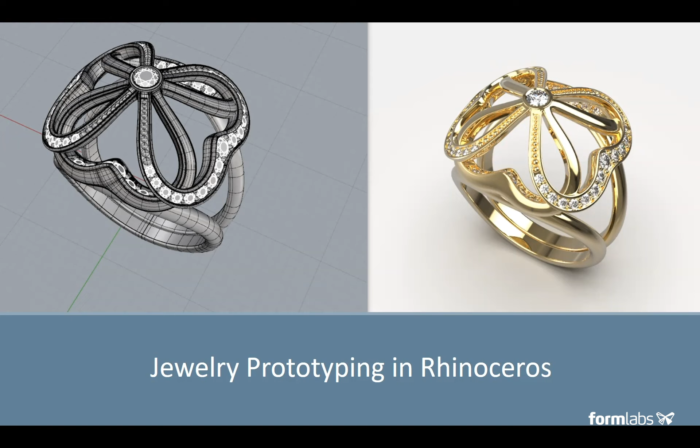As Lizz mentioned, I've been working in various capacities within the jewelry and fashion industries for over 10 years, and a lot of that time has been spent prototyping in Rhino. So I'm excited to share with you some of the knowledge that I've gained along the way in 3D so that you could possibly integrate it into your own workflow.

So let's talk about where 3D can fit into your design workflow. In my workflow, I have 4 general steps to creating a finished piece of jewelry: concept design, 3D development, prototyping, and manufacturing. Every designer's process may be a little different, but generally when I'm developing a new piece, I begin with concept design. Concept design for me means sketching and gathering references, but for some other people, concept design could be straight in 3D. If you do start with a sketch, in 3D you can bring in your reference image and begin building off of that.

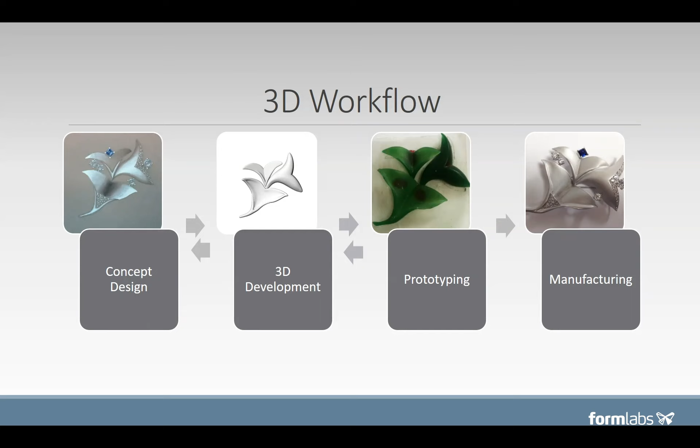I've marked the arrows going both ways for the first three phases because oftentimes this workflow isn't completely linear. You may get callouts and you need to go back to the concept design or back into your 3D model and make modifications. This is very common, but of course the goal is to have as few back and forths as possible. Adding 3D into the mix really enhances the visuals and information provided to both the client and the manufacturer and helps you get to that last phase, a manufactured piece that can be sold or worn, whatever your end goal is.

Benefits. Just want to highlight a few benefits that I think are really important for Rhino with jewelry. First, we have quicker decision making. As many of you know, there are a lot of small details that need to be worked out when creating a piece of jewelry. Details like junctions or transitions or stone sizes, those are all elements of designs that may not be fleshed out during your concept phase and may affect the end look of your piece. When you're creating in 3D, all of those details are worked out. You're looking at a fully visualized representation of your design and can make almost instant design calls and modifications as you build your 3D model.

Next, we have clear design intent. When you send a 2D design to a factory, inevitably there will be some interpretation involved. You don't need to rely on anyone interpreting correctly if you have a 3D file. What you want your piece to look like from every angle has already been thought through.

Quicker development time. When there are fewer details or detailed questions to be worked out at the manufacturer level, it will mean you've cut down the time needed for development with that jeweler or that factory. Providing the clear design intent means less iterations and you can get to an approved final version of your piece in less time. Another great benefit is that 3D is very cost effective. As they say, time is money. Less iterations mean less cost of materials and less labor.

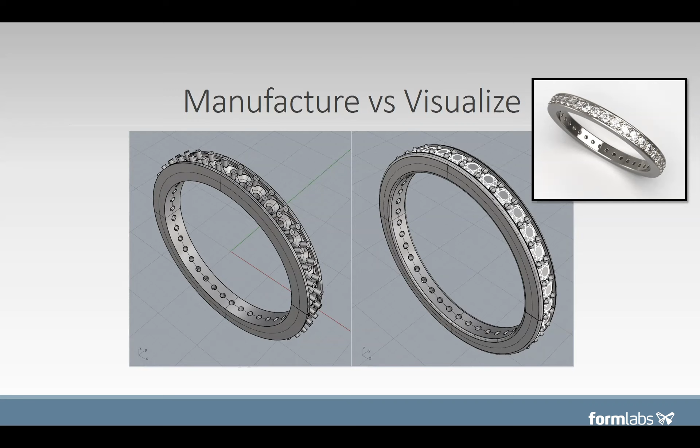The file that you create for rendering, on the other hand, is to visualize your end result. When you show a final design to a customer, you want to present a finished looking piece. And in that respect, the prongs and the edges, they'll be polished down and the stones will look like they're set. So just keep that in mind when you're beginning a new project. Ask yourself, what is your objective? So let's get into Rhino a little bit.

There's a lot of 3D software out there, and you'll find that a lot of them work very similarly. I primarily use two programs. I use Rhinoceros or Rhino, and I use T-Splines. Rhino models NURBS surfaces. NURBS modeling is often found in industries where form and function are important. So think aerospace and architecture, and of course, jewelry.

I find working in Rhino allows you to have a great degree of flexibility in your designs while still maintaining the precision modeling needed for prototyping and manufacturing in the jewelry industry. As many of you know, jewelry expression is really limitless, but jewelry is also very small. So when you're working with minimum tolerances for wall thickness in metal or when you're setting stones, it's really important to have precision. There are other NURBS software out there that offer you that level of precision.

SolidWorks is one of them, but what sets Rhino apart is its flexibility. Other programs are usually very structured. You start with a solid object and then you sort of cut away at it to get your desired shape. With Rhino, you can really start anywhere. How you want to build your design is completely up to you.

And then lastly, Rhino allows you to tailor how you work in the program by adding features called plugins. There are hundreds of different plugins for Rhino that you can download to enhance your modeling experience. These can be industry specific, like Matrix, which I spoke about earlier, or it just can be a general modeling tool, which is what T-Splines is, and I'm going to talk about that in a little bit.

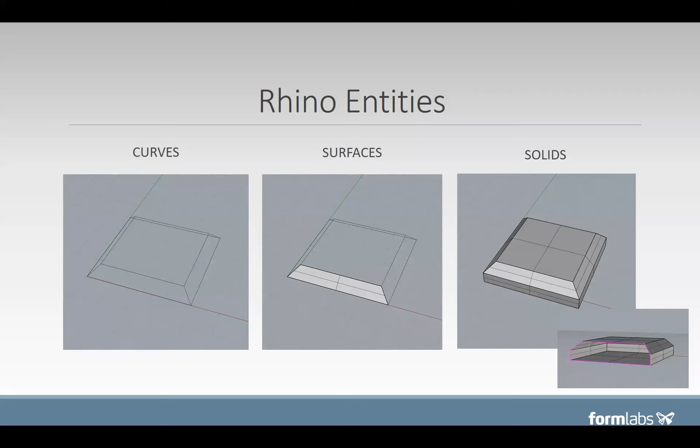T-Splines. As I said earlier, T-Splines is a plugin for Rhino. T-Splines allows you to perform a different type of modeling within Rhino. It's called subdivision or polygonal modeling. Whereas Rhino creates NURBS surfaces, these are mesh surfaces. There are some very popular programs out there where sub-D is the primary form of modeling, such as Maya or Modo. And the reason that they're so popular is it's often used in character building for video games or for special effects. And it allows you to build something very organic with a lot of control.

Where Rhino might be used in jewelry for things like ring shanks or stone settings, I use T-Splines to help create my organic, complex shapes, anything that might have a complex connection point that I want to be smooth. Shapes like this are possible in Rhino alone, but you can really achieve them in a fraction of the time with polygonal modeling. And on a personal note, I find it much easier to explore my designs and play with shape variations in T-Splines because modifying it is a lot quicker for me than in Rhino alone.

A quick aside, T-Splines is no longer available for purchase for Rhino. It was integrated into a software called Fusion 360, but there are plenty of other sub-D plugins available, and any of the principles that you see here today about sub-D or polygonal modeling can be applied to any of those software.

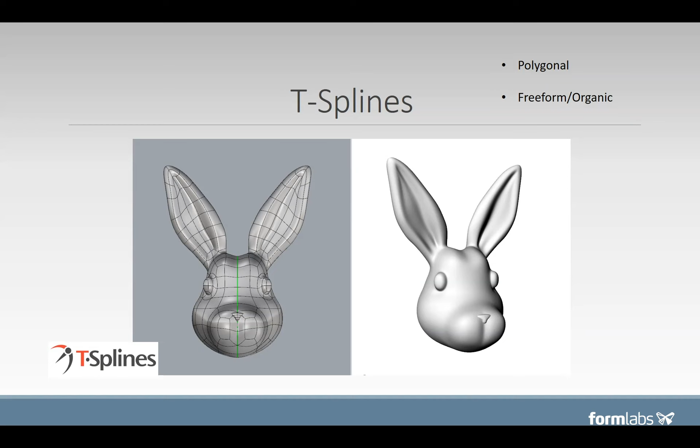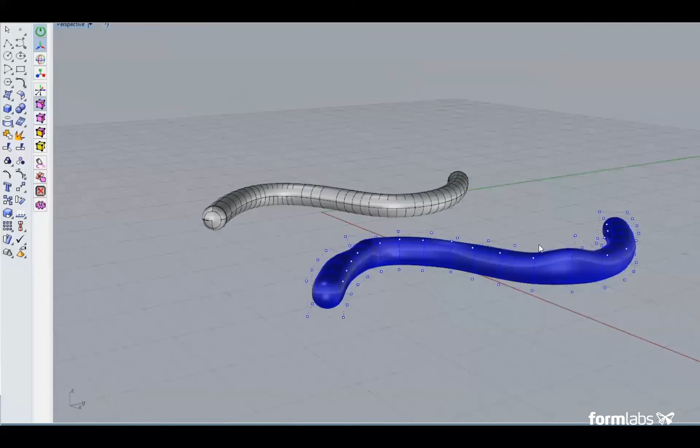With T-splines, I can modify the elements that create it. So I could modify its faces, which you see here are being highlighted. I can modify its edges, or I can modify its vertices, which are the junctions of the edges. And I can do that the same way that I would modify the Rhino pipe, but just with that one element. So I can rotate them, I could scale them, or I could translate or move them. So you see I have a high degree of control when I'm modifying my T-splines. You can be very targeted in your modifications to a sub-D model without a lot of extra steps. And that's why it's very useful for models that are more free-form or organic.

So let's get started modeling. We're going to be modeling this butterfly ring. I'm going to model the shank in Rhino, using curves to show you how that's done. And then I'll model the butterfly in T-splines so that you can see how that's important for an organic shape that you might want to explore your design with. So let's get out of this and into Rhino.

So a few things before we get started, I just want to explain. There are 3 different ways that you can initiate a command in Rhino. You can do it over here with these buttons. If you extend, there are further buttons inside, and if you hover over, right and left click mean different things. The same commands are up at the top, they're just separated by categories, so all the curves are in here, surface, etc.

And then you can initiate a command with the command bar by typing. So if you know what your command is, you can just start typing. There is no right way to initiate a command. Just know that I do all 3. I mainly type, but I do find buttons sometimes or go up to the top. Really, however you want to do it is fine.

And then the other thing that I want to mention is that it's really important to maintain an organized, structured layer tree. So you see over here, I've already created a new layer for each entity that we will be using. And this will be really helpful when we need to go back and reference something from earlier, or if later we need to make modifications to something. It's not all in the same space, it's very organized, and I'm not going to lose any of my information.

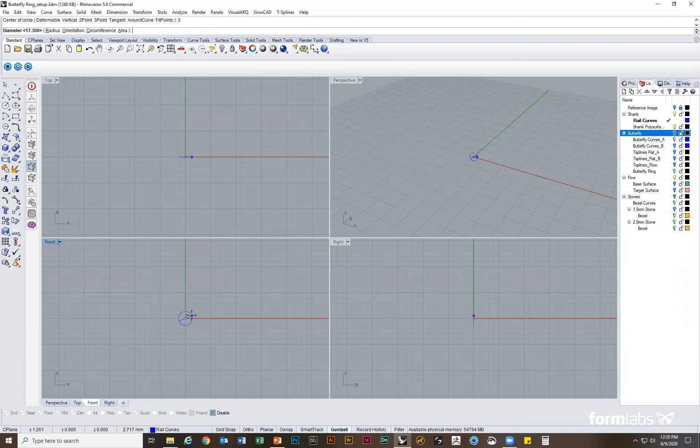I'm gonna come over here to circle, and one thing that Rhino is really helpful with for beginners is that Rhino actually prompts you. It asks you questions in order to complete the command. So if ever you're stuck and you don't know what to do next, all you have to do is come up to the command bar and look and see what it's asking you. So in this instance, it's asking me, where do you want the center of your circle? Well, I want the center of my circle to be at the origin, so I'm just gonna hit 0 and hit enter. And now it's asking me, what do you want your diameter to be?

Well, if I didn't need it to be parametric, I could just pull out to whatever size I thought looked great, but I do know I need it to be 17.3 millimeters, so I'm going to type that and hit enter. Now we only need the bottom portion of this finger hole at the moment, so I'm going to split it with the command split. And I'm going to split it, this is my object I would like to split, and I'm going to split it with a point. So I'm going to come over here, oh, my snaps are off. I'm going to get a mid snap and an end snap and hit enter. And now you see I have 2 separate curves.

So I'm just going to lock this top portion because I don't need it right now.

So now what I need to do is tell Rhino what I want the shape of my ring to look like. Do I want it to be square? Do I want it to be round? I'm basically going to build cross sections of my shank and allow Rhino to flow it along this finger hole.

So I'm going to build my profile. This time around, I think I want the inside of my ring to be flat, and I would like the outside to be a little round. So I'm going to build a profile that looks like that.

I'm going to come over here to my line, and make sure that I'm at the end of my finger hole and click. Now I know that I want a 2 millimeter wide profile at this point, so I'm going to hit 1 because it's 1 in each direction. And I'm going to hit shift to make sure that it's straight and click.

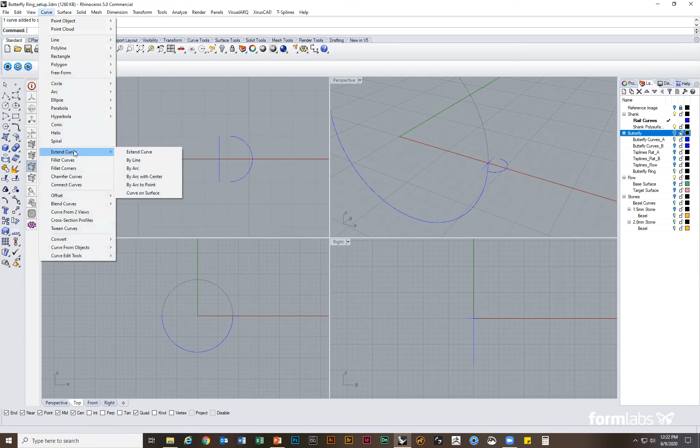So now I need to connect my 2 curves. I'm going to come up here to curve, extend curve by line, and just make sure that my 2 curves meet. You see I still have 2 separate curves, so I'm going to join them together so you can see it says 1 closed curve at the top.

Now the last thing I need to do is a little too sharp here. This model is for visualization, so I want to add all of those fillets in, all that polish, those polished edges. So I'm going to use the command fillet, and I want to change my radius to 0.3 millimeters.

So I'm going to select the two parts of my curve, and you see I've filleted, I've rounded out that corner. Now, another great feature of Rhino is that it allows you to save time by right-clicking, and you can initiate the last command that you just did. So I've just done that, and I'm just going to fillet this other edge.

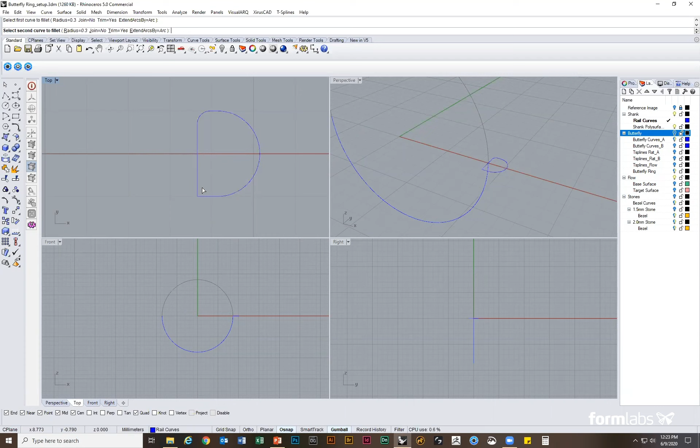Okay, great, so now we have our profile curve. Our shank is actually going to taper, so it's going to be this size at the midpoint, and then it's going to get larger at the bottom and taper to the same size at the other end. So I'm going to take my profile and mirror it or copy it to the other side to make sure that it tapers to that same size.

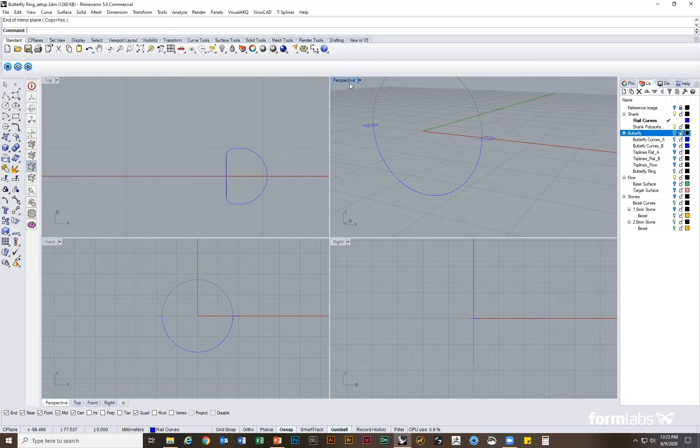So I'm going to hit mirror, and mirror it onto the other side of my finger hole. So I've already created the larger portion. I did it the same way that I've shown you the smaller one, just in the interest of time.

So now let's get going creating our shank. I'm going to get onto the right layer, which is our shank poly surface, and I'm going to use a command called sweep 1.

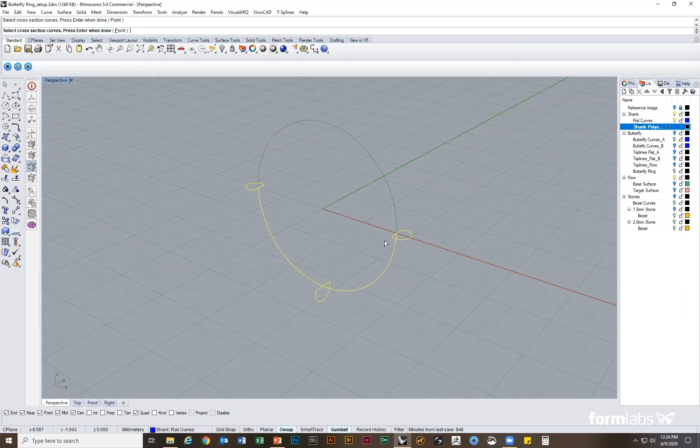So Rhino's asking, what rail do you want? Well, I want the rail to be our finger hole. And then what are your cross sections? Going to select our cross sections. Now I could have gone counterclockwise or clockwise, either way doesn't matter, just as long as you are selecting them one after the other. I'm going to hit enter.

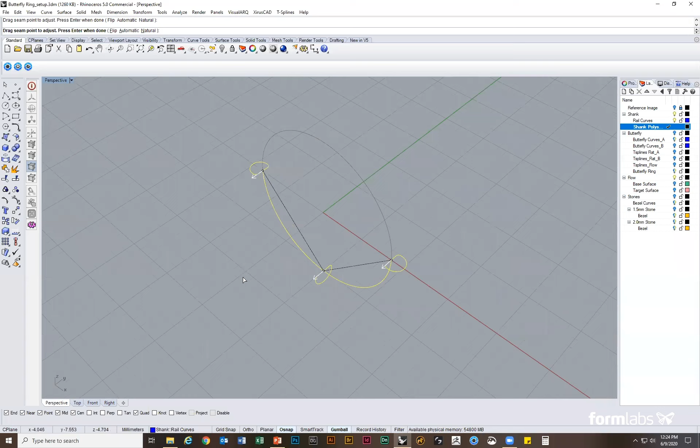And the last thing I need to do is adjust my seams to make sure that they're all hitting my profile in the same spot. I usually just move them over to where they intersect with the rail so I know they're in the right spot. Then you just need to make sure that your arrows are pointing the right way. Now they are. Hit enter.

Here are some other modifications that you could make, but I don't need any of those. I like what my shank looks like. Now you see I have an open poly surface, or open surface, that is my shank.

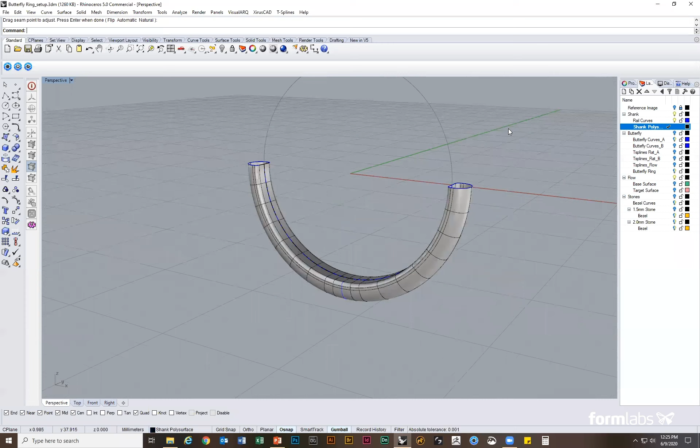So now what I need to do is start building my butterfly. I'm going to turn on this reference image. It's just a rough sketch that I made, and I've already pulled it in, scaled it, and placed it where I want it to go. Those are things you would have had to do if you were starting from scratch.

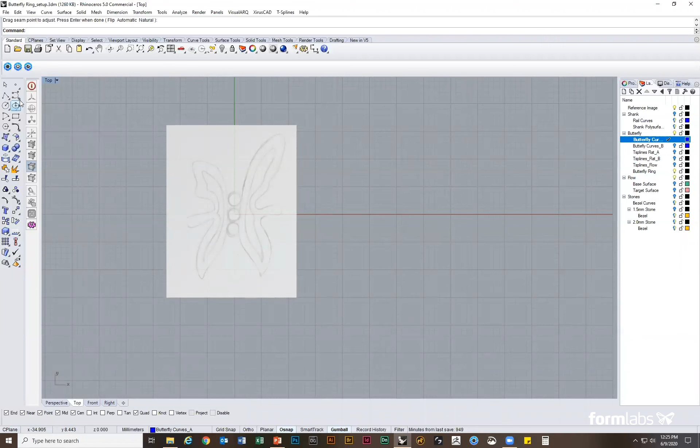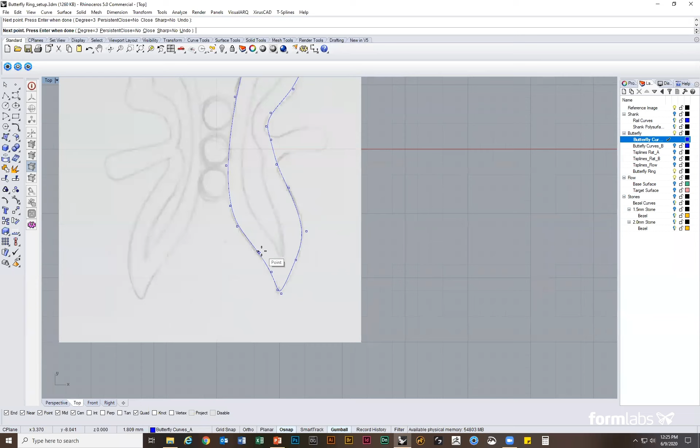But I want to start tracing over my butterfly, so I'm going to use a control point curve and just start tracing. I'll click everywhere the shape sort of changes, just keep clicking, and make sure you're closing it up so you get a point snap and close your curve.

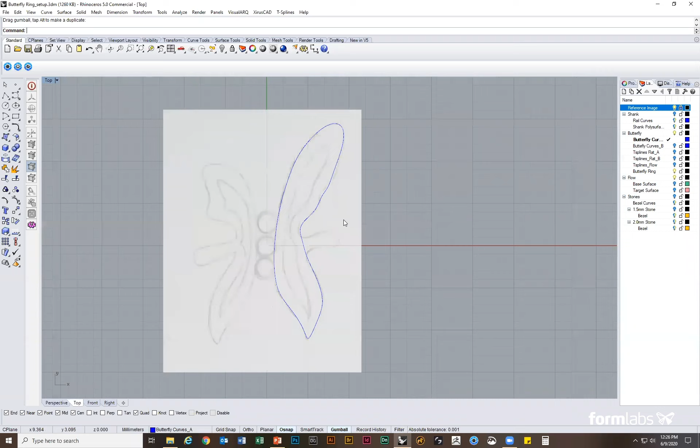Now, if I didn't like this, I could start over, or I could lock that, turn on my control points, and move my points so it fits the shape I want. I need to do this for the outside of my wing and the inside on both sides. I've actually already done that - you see I've created a curve on the outside and inside for this wing, and the same on the other side, with a couple modifications based on my drawing.

Now we need to create a surface from these curves. There are a couple ways to do that, but I'm going to turn this surface into a T-splines, because when I put it on my ring, I want to be able to modify it. I might not like the shape once it's up there, so I want it to be a T-splines. In order for that to happen, I'm going to use a command called sweep 2, which is very similar to how we made our shank, but that way I can turn it into a T-splines.

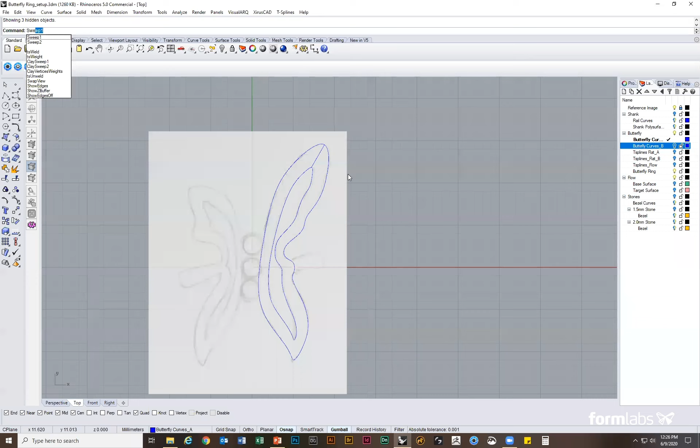So I'm going to use the command sweep 2. Let me just turn off my reference image. What is my first rail? This is my first rail, this is my second rail, and this line here is my cross section. I'm going to hit enter. Now everything that it's created here, all of these lines, they're called isocurves, and it's basically just information telling Rhino how the surface needs to look.

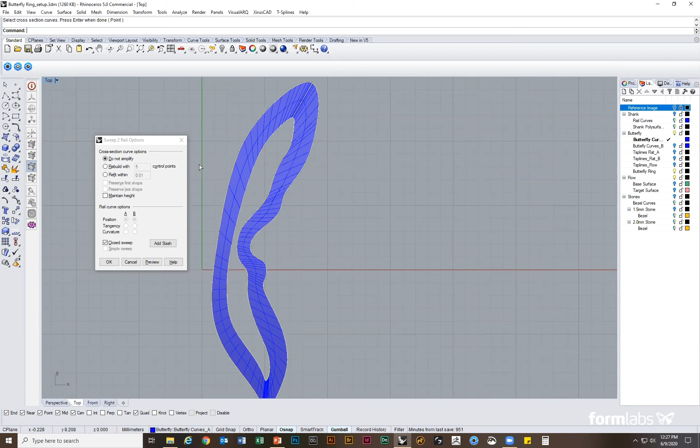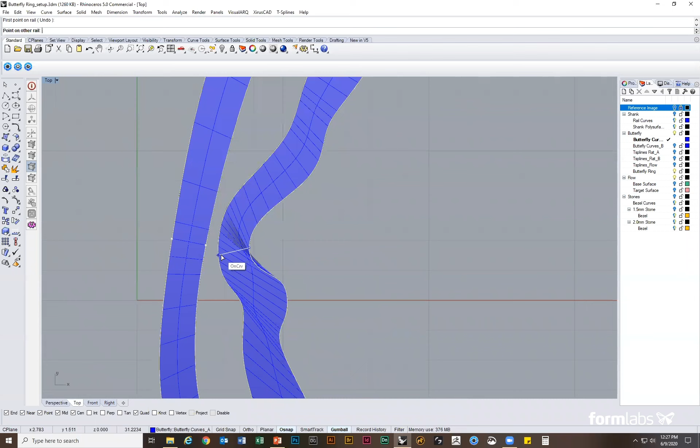Because I'm turning it into a T-splines, I want to make sure I'm very targeted in where my isocurves are and the direction they're going. So I'm going to come over to add slash and start straightening it out a little bit, clicking on one end and the other, making sure that anywhere my isocurves are a little angled, they become straighter. Right here it actually folded over itself, which would not be good, so I'm going to straighten that out, and here and here. Okay, so now it looks okay. Hit enter and hit okay.

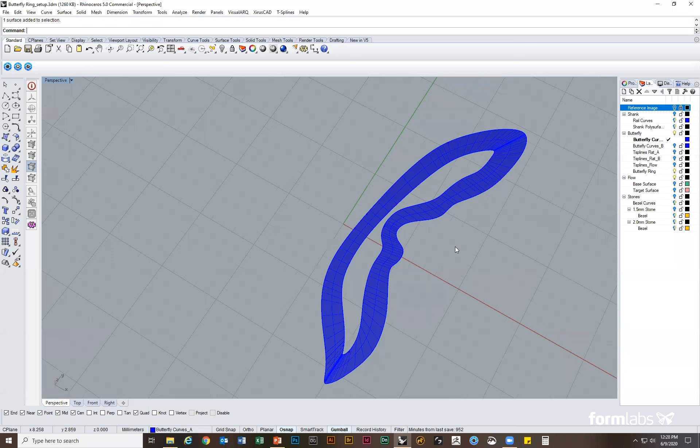So if you see from the perspective view, it's just a surface right now - it really has no dimension, but I'm going to turn it into a T-splines and give it dimension after. The next thing I need to do is rebuild. I rebuild a lot when I'm modeling - I think it's really essential to keeping your curves and surfaces simple and even. This step will really help when you're doing more complex commands like filleting edges, blending surfaces, or booleaning. If you rebuild, you'll have a much easier time doing that.

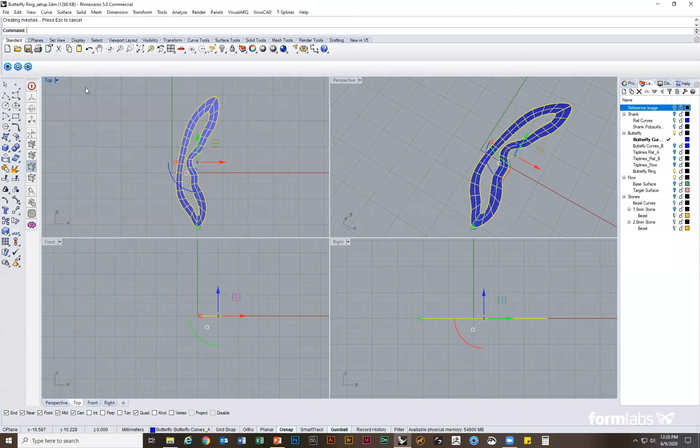So I'm going to select my surface and hit rebuild. Now I can designate how many points I want going each direction. These points are fine - I think 30 will get me to where I want to go, and 4 is fine for the V direction. I'm going to hit enter. Now you can see it actually changed the shape a little bit because Rhino essentially lost information of how that shape is going to go. But because I am turning it into a T-splines, I'm okay with this.

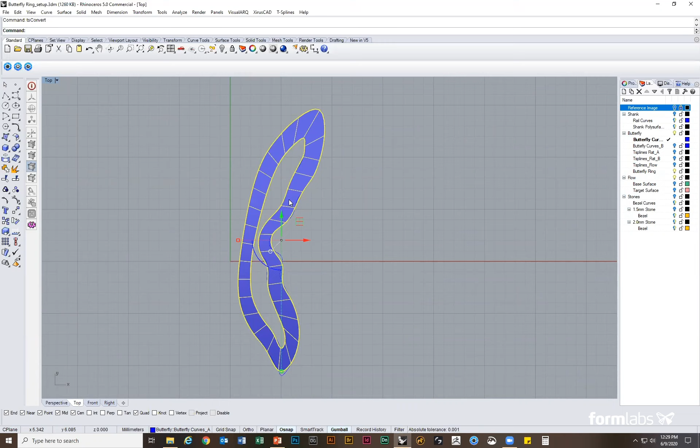So I'm going to hit TS convert, and that's going to turn it into a T-splines. Anytime there's a TS before your command, you'll know it's a T-splines command. Now I know this is a T-splines command because if I come over and enable T-splines, you can see I now have faces, I have edges, and I have vertices.

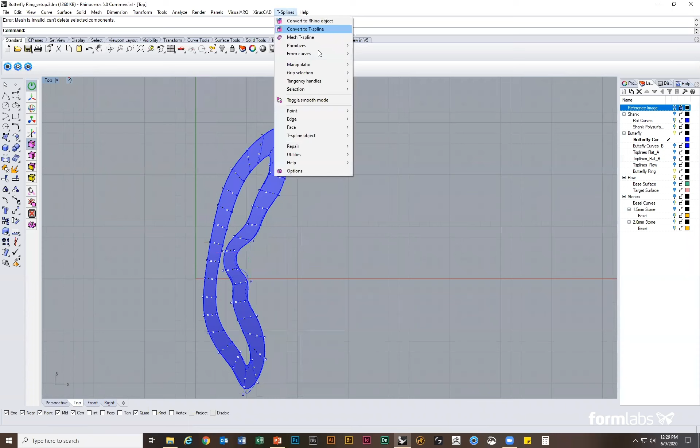Now those inside vertices are not something that I want. They're tangency handles, and I'm just going to delete them. I'm going to come up here to tangency handle and select all tangency handles and delete. That didn't work. Let me try one more time. Select all tangency handles and delete.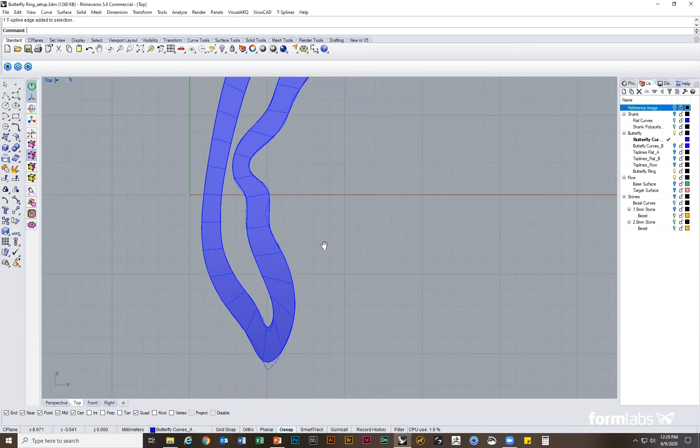So now what I can do is I can just start modifying my T-splines. I can take my Gumball and I can start pulling on my vertices or pulling on my edges to make it look the shape that I want it to look. I can even come over and add an edge if I want. So I'm going to double click on this edge and I'm going to hit TS insert edge and add an edge here.

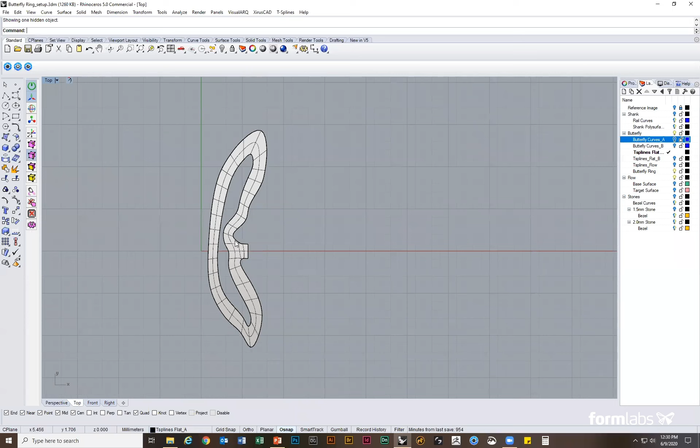So I've actually already done this. I'm going to hit show to show you. This is my T-spline surface. I've made it so all the edges are where I want them to be. I've also added a few faces coming out here, and that's really going to help with connecting my butterfly onto my shank at a later time. So I have it for this side and I have it for this side.

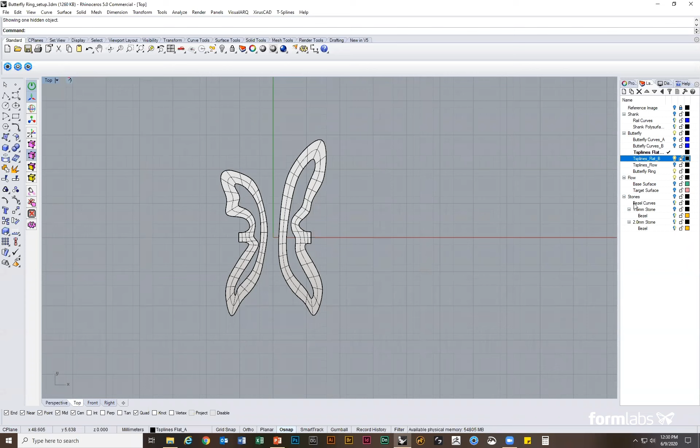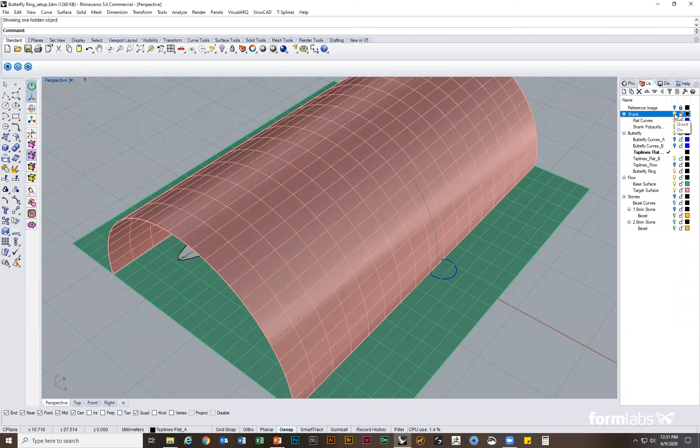So now what I need to do is, it's flat right now. It's planar, and I need to put it on my ring. And I'm going to do that with the command called flow along surface. So what I need is two surfaces. I need a surface that's flat, that is the same plane as my butterfly wings, and I need a surface that is where I want it to go, and that's going to be the top of my ring. So I actually got this surface from this top portion of my finger hole that we lofted earlier. I created a surface out of it already to save time. So the command is flow along surface.

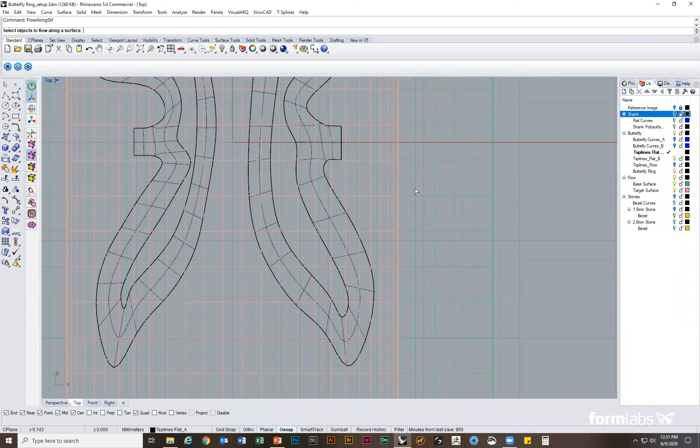It's asking what objects do you want to flow? Well, I want to flow my butterfly. So I'm going to make sure that I grab my butterfly. I don't know why this isn't working. Oh, it's because T-splines is on. Let me try again. Flow along surface. Objects I want to flow.

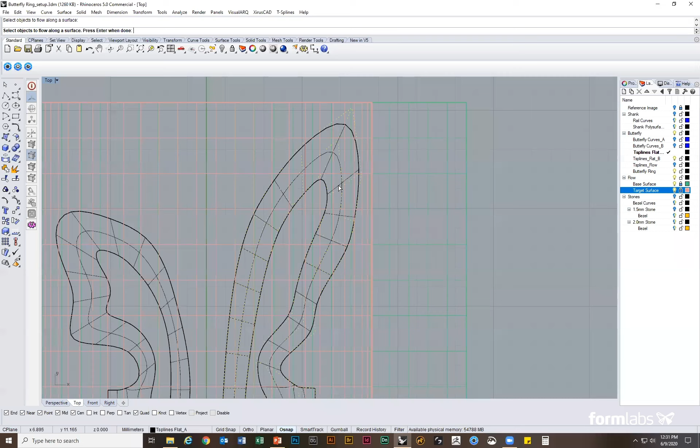It's my T-splines. Now you're going to get this little dotted yellow cage, and that's a good thing. That means that it's keeping it a T-splines. If you didn't get that cage, then it would actually be turning it into a Rhino surface and you wouldn't be able to modify it after. So we're happy with this cage. Now it's asking, what's your base surface? Well, the base surface is my green flat surface.

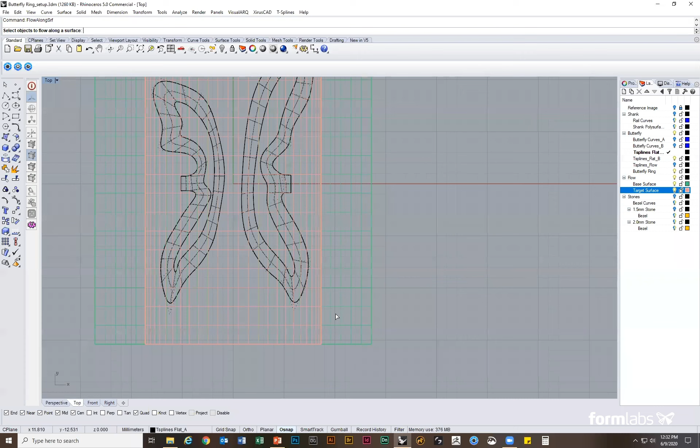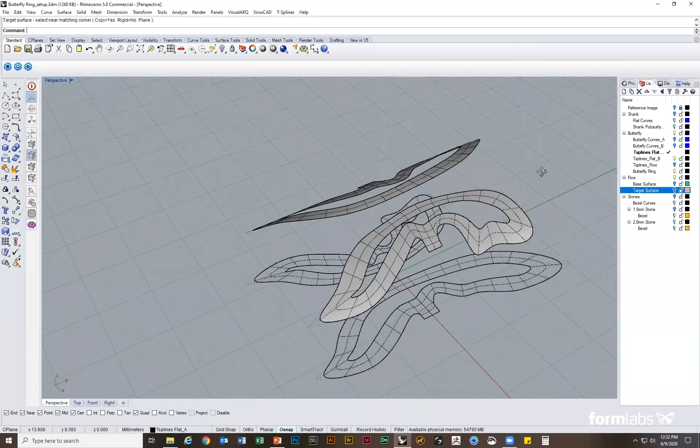Oops, sorry, I need to do this one more time. Object I want to flow is my butterfly. Base surface, and the pink surface is my target surface. So if we come over here, you can see I've essentially put my butterfly onto my ring, onto my finger hole. So let's just delete out these meshes. I'm going to hide this.

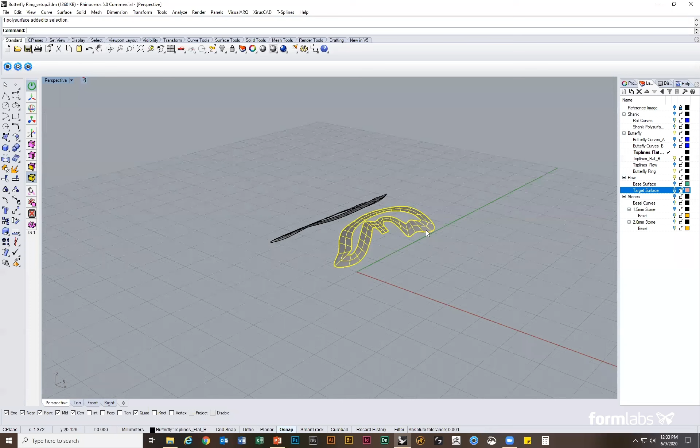And now I can just start playing with my T-splines. I'm going to thicken it. I'm going to give it dimension. I'm going to use the command TS thicken. I'm going to thicken 1 millimeter. So now you can see I've created sort of a squished pipe almost.

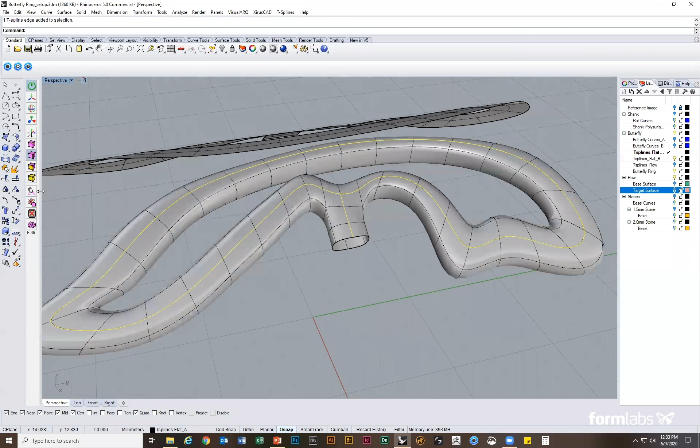And I'm just going to start modifying. I'm going to delete these faces. I'm going to take this edge and this edge, and I'm going to pull it up 0.5 millimeters because it's still a little too flat for me. So now it's a little rounder, it's a little chunkier. And the reason why I want it to be a T-splines is because I can now play.

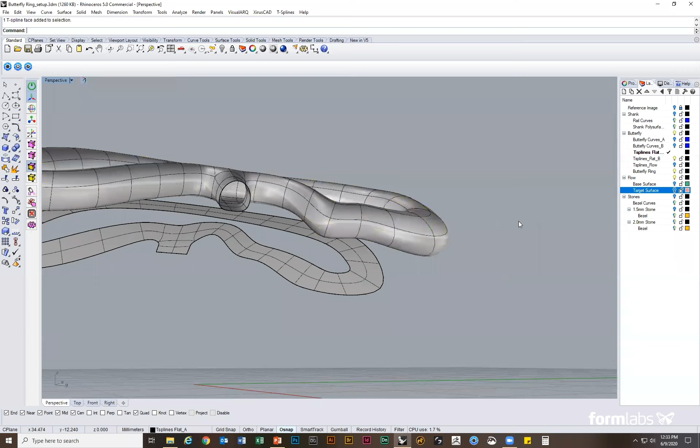So say I wanted the top portion to be a little bit taller than everything else. I can just come up here and I can pull it up. I could do the same for the bottom if I so choose. If I didn't like the shape, now that I'm in here, say I don't really like the shape, I can take some of these edges and pull them out and change the shape.

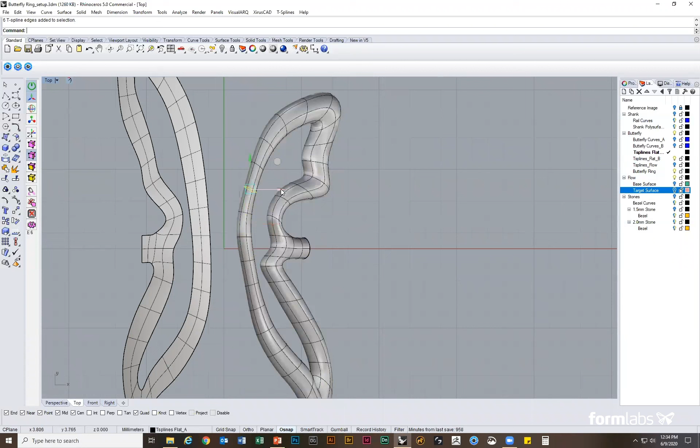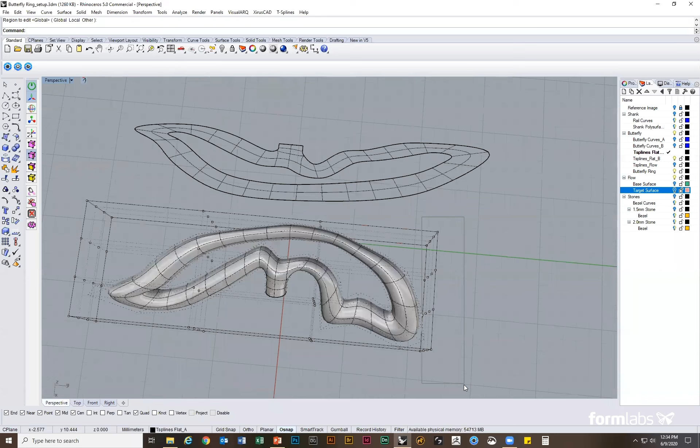I can even do things like broad modifications. I can use a command called cageEdit, which is a Rhino command, and you can get a bounding box, and I can pull these up if I wanted to change the shape. So all of these things are really helpful when you're not quite sure what you want your design to look like, and that's why I want to keep it a T-splines.

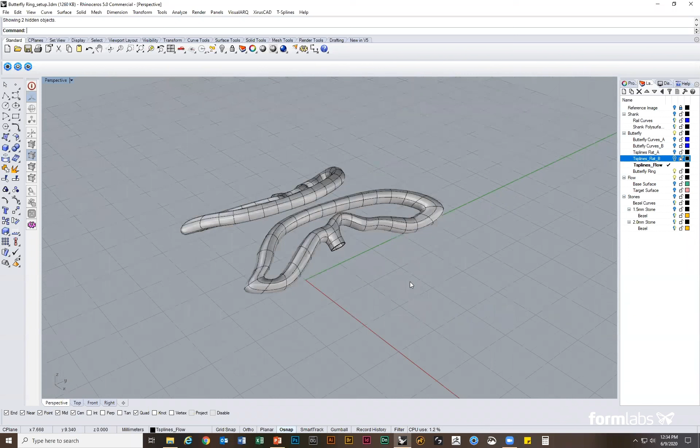So let me just get off this layer. I'm going to hit show, and as you can see, I already have created a butterfly that I like. I've pulled the edges and the faces, and I'm happy with how this looks. So now what I need to do is I need to connect it to my shank. I'm going to copy these and put them on the right layer, and that's going to be my butterfly ring.

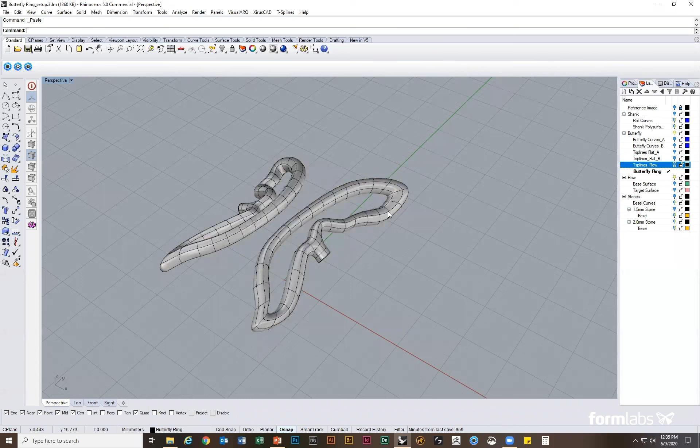And now I'm going to convert these into a Rhino surface. So I'm going to select them, and I'm going to hit TS convert to Rhino surface. So now they're not modifiable anymore. If you see, I turn on T-splines, there's no faces or edges to be able to select.

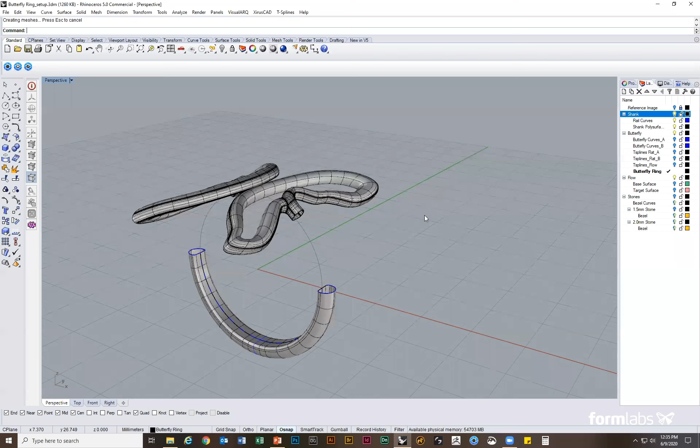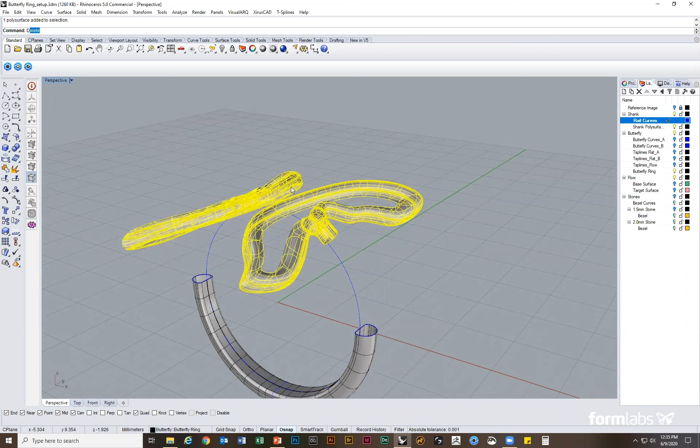Now I'm going to connect my butterfly the same way that I made my original ring shank. I'm going to use the profile of the open part of my butterfly with the bottom or the midsection of my shank. So let me just unlock my curve. And I'm going to create the profile from this open portion of my butterfly with the command duplicate border. So you can see I've created a closed curve from that open space.

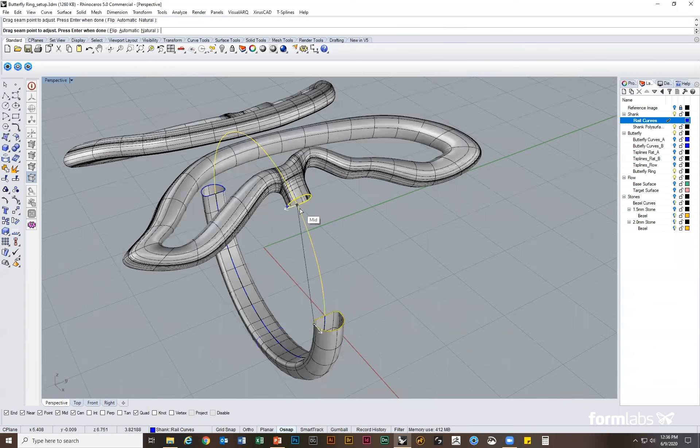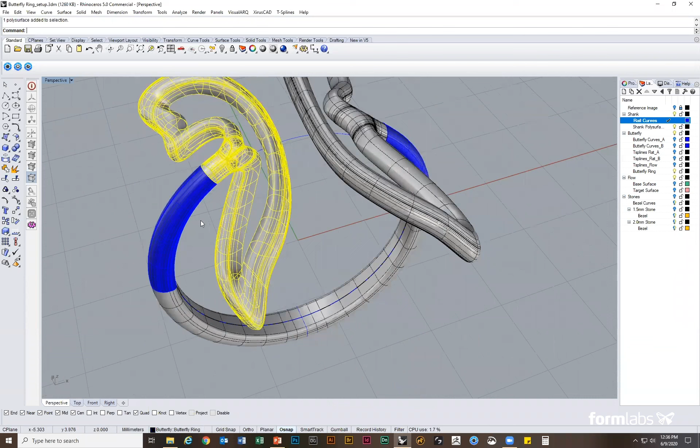Now I'm going to use the same command I used before, sweep 1, and it's asking what's my rail. Here's my cross section, and here's my second cross section. Hit enter. Again, I just need to make sure that my seams match. Hit enter. And OK. Same thing over here. I have a rail, cross section, enter, and OK.

So right now I have 5 separate polysurfaces, and I need to make them one. So I'm going to join them together. I'm going to select everything, and I'm going to hit join. Just want to make sure that it's on the right layer. And I'm going to turn off my curves.

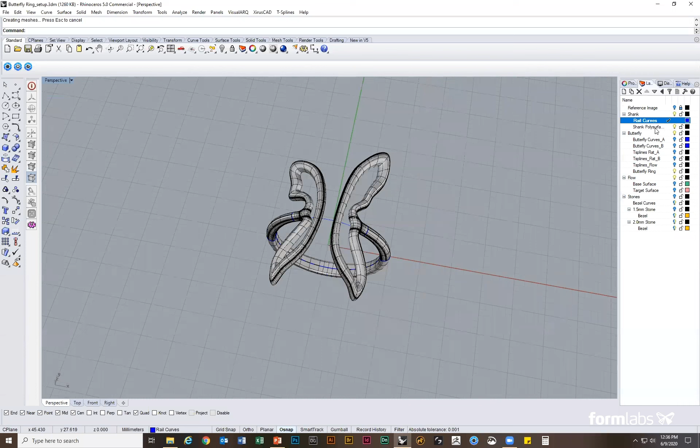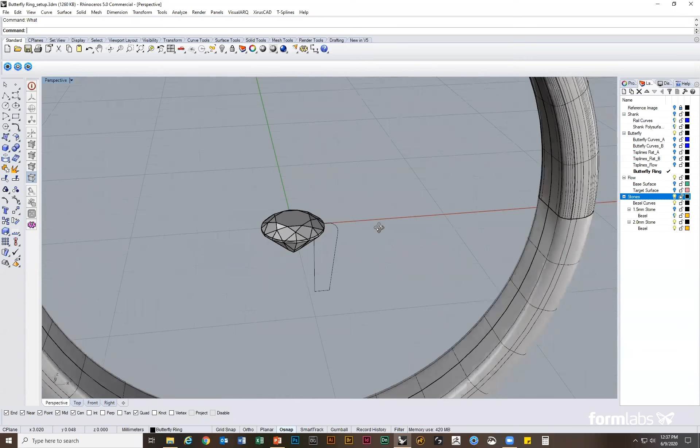So now let's just check that it's closed. I'm going to go over here to What, and you can see it says closed polysurface. So now I know that this surface would be able to be printed if I wanted it to. Now the last thing I need to do is I just need to add my stones. I've already pulled in a stone and sized it to the size I want, which is 2 millimeters, and I've also created a profile curve for what I want my bezel to look like.

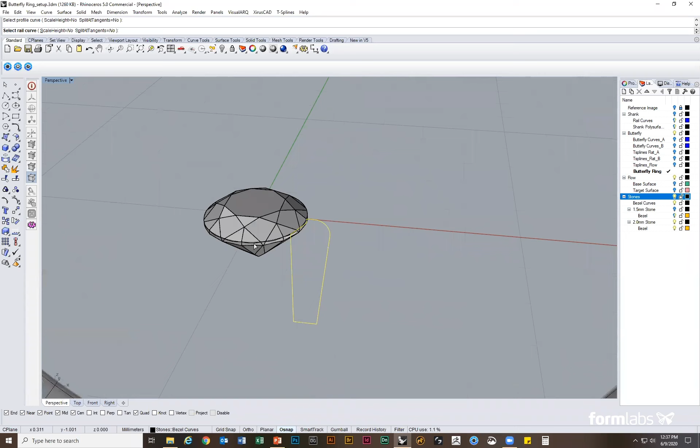So I'm going to make my bezel with a command called rail revolve. I'm going to hit rail revolve. It's asking, what do you want your profile curve to be? That's this. What do you want your rail curve to be? And that's basically the diameter of my diamond. And then what is your revolve axis? And that's just the center of my stone. So I'm going to get a center snap and pull down straight away. And now you can see I have a bezel. Just going to put that bezel on its right layer.

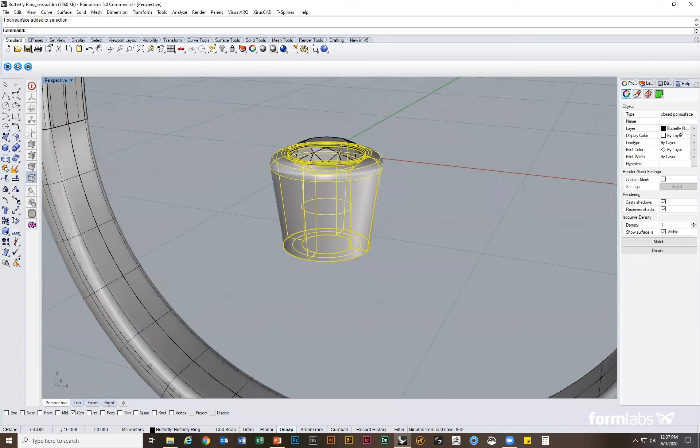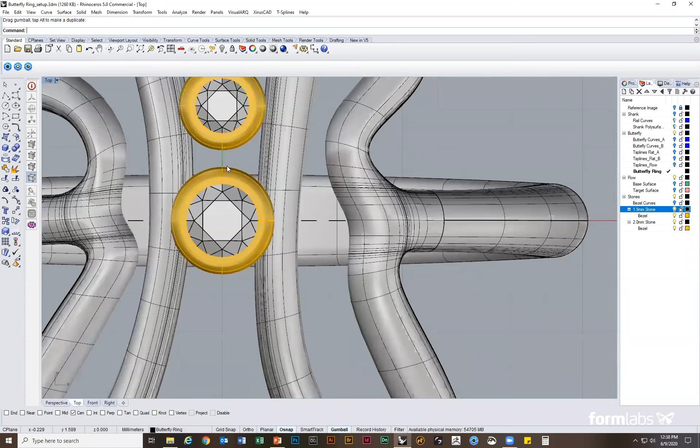And the last thing I need to do is I just need to move these stones and place them where I want them to go. I'm going to turn off my rail curves and turn on, I've already made it for 1.5 millimeters. I'm just going to use my gumball and pull it straight up, pull it to where I want it to be. Then I'm going to come to my top view and pull this over and place it where I want. I'm going to copy it, copy my 2 millimeter to my other side.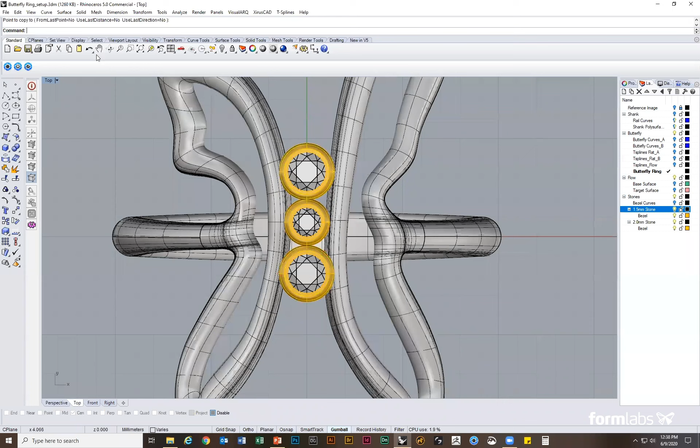And that's really it. I just want to make sure that everything's touching. I'm going to select my bezels and my butterfly and use a command called intersect. And you can see it's created curves everywhere that it's touching, so I know that that's okay. Now the last thing is, these bezels are too tall and I need them to be cut because this ring wouldn't actually fit me right now. The bezels need to follow my finger hole.

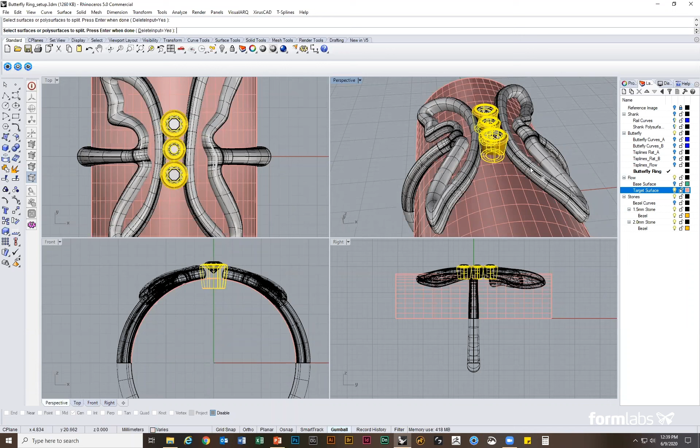So I'm just going to use a command called Boolean split, and I'm going to split it with that target surface that I had created earlier. I'm going to hit Boolean split. I'm going to select all my bezels. Those are my surfaces I want to split. My cutting surface is my target surface, and hit enter. Now you can see I've cut out that portion, so now it follows my finger hole. So that's really it.

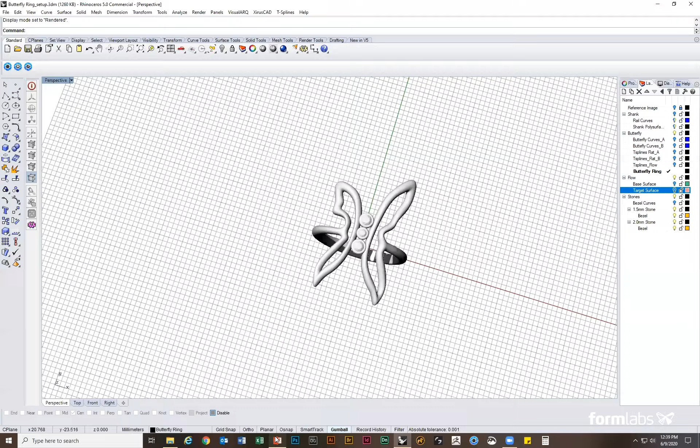Now I have a butterfly ring that I can prototype if necessary. So let's just get back in here. I'm just going to come in.

So if I could leave you with anything, it's just a few tips that I have figured out with working with Rhino. First is work simply. The simpler your curves, the simpler your file, the easier your life will be. To that effect, rebuild when possible. The more that you rebuild, or when you rebuild very important aspects, the easier your life will be when you're doing more complex modeling later on.

Maintain that clean file structure, and finally, reference the command bar, because if you're ever stuck, that is really what will help you. And then finally, practice. The more that you practice, the better you will get. And that's it for me.

Thanks, Debbie. That was awesome. I actually learned a few things from you that I sort of wish that I had come over to your desk at one point and asked you about. I didn't even realize that you could, in the drop down, select tangency handles and delete them en masse. That probably would have saved me collectively like 50 hours of my time. So yeah, that's definitely very helpful.

That was really good. Yeah, thank you. That was wonderful. I really appreciated you breaking that down in terms of workflow and best practices and the sort of like why and not just the how.

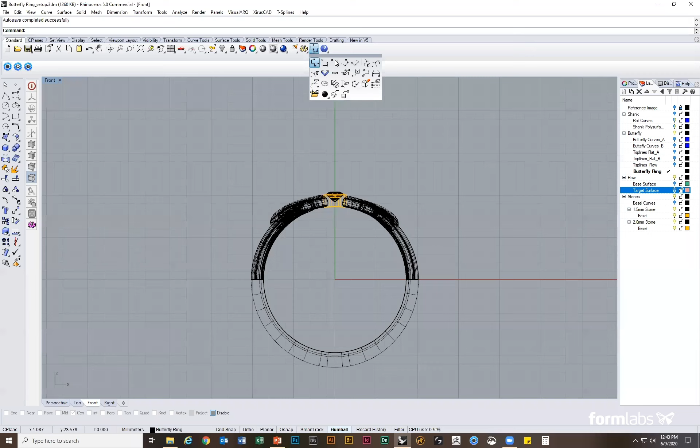Sure. So with Rhino, you check dimensions. Let me just see if I can get out of this. You would check dimensions with your drafting tools. So there's a bunch of different tools you can have. You can check a diameter, you can check a radius, you can check an angle. So you could come over, and if you have your right snaps on, which I do not, you could essentially snap to portions of your model and figure out the dimensions that way.

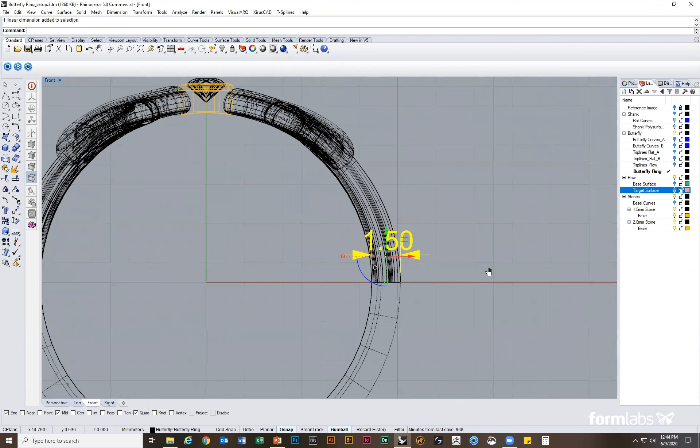And that's really great for creating, if you need to have sort of like a 2D image with dimensions on it to hand to a manufacturer, just so they know what they're making, anything like that. The drafting is really helpful, and to check with that.

With T-splines, usually you can create T-splines around curves. So if you make sure that your curves are right and then check later, there might be a slight, it's sometimes like for a T-splines pipe, it might be a little bit smaller than exactly what a Rhino pipe is. But I usually use T-splines for things where the precision doesn't need to be there.

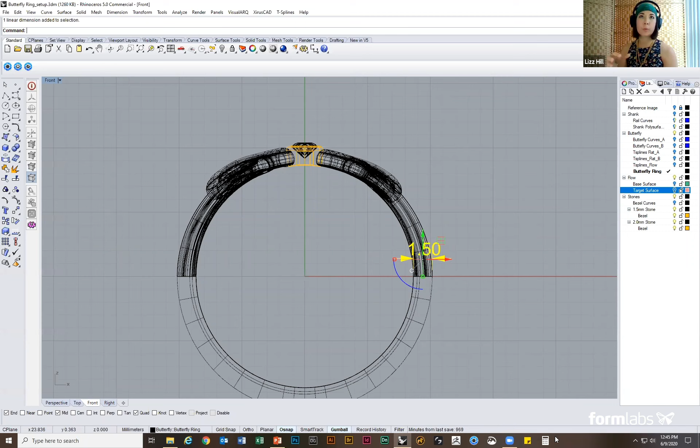Right. So like in this case, the butterfly, sort of the shape and the footprint of the butterfly had no dimensional requirements, whereas the shank obviously has to hit a certain ring size. Right, exactly. Gotcha. Okay, thank you.

Just in terms of sort of learning Rhino, are there any resources that you recommend to learn the different commands? What's the learning curve like generally for a new user in learning Rhino? Yeah, well, so there's a lot of great resources on LinkedIn Learning or on Lynda. I haven't particularly used them, but I know some coworkers that have used them and they found them incredibly helpful.

I also took a refresher class. There's tons of classes out there that are available in your city that you can take. But truthfully, the number one way that I have learned to get better at Rhino is just to practice. There's the help bar up here that can help you if you need to figure out a certain command or how it works. And then there's a lot of information online, a lot of demos on YouTube that are available for you to watch. But the more that you practice, the more comfortable you'll be with how the commands work.

I honestly am still learning commands in Rhino. There's so much in here for you to learn. And so it's really just up to you to expose yourself to it. And if you had to ballpark guess how many commands you actually use on a regular basis, is it tens, hundreds? It's maybe between 50 and 100, I would say. Yeah. But there's probably a lot more commands than that. Oh, way more, yeah.

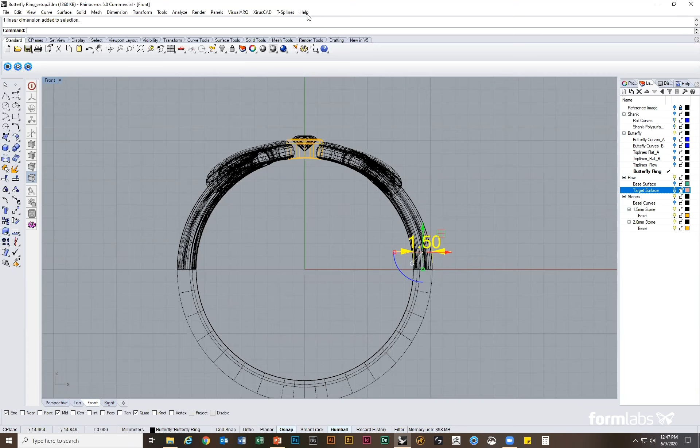And I think that's the key message there, is that with any CAD software, especially one that's more general use like Rhino, not specifically for jewelry, you're going to find which of those 50 or so commands you're really comfortable with, and they become just really intuitive. Would you agree with that? Exactly. Like when I had the flat butterfly curves, I could have created it with a command called PlanarSrf, which would have just made a flat surface out of my two curves. But because I wanted it to be a T-splines, I used Sweep2. There are multiple commands for a lot of things, and a lot of times there isn't really a right answer. It just depends on what you're going to do next.

Gotcha. And then jumping into prototyping, which I realize may not be totally directly your day to day. So there's a question about tolerances. Let's see here. I think this question might be more about accuracy or tolerances. Actually, let me skip over that and see if there's something that I can answer there. Oh, just some spelling of those names.

So T-splines is T-S-P-L-I-N-E-S. However, not currently available for Rhino. Correct. Well, as you mentioned Clayoo, which is clay, so Clayoo. That one is available. And then Sirius, you said, was another one? Yes, that one is Xirus, I believe. I just tried it once. So Sirius with an X.

And then other softwares that are specifically based in SubD, so Modo, Maya. Correct. Do you think that those are more advanced softwares to learn or just different? Well, I think they're a little more advanced. I haven't ever tried Maya. Maya is supposedly incredibly hard to learn.